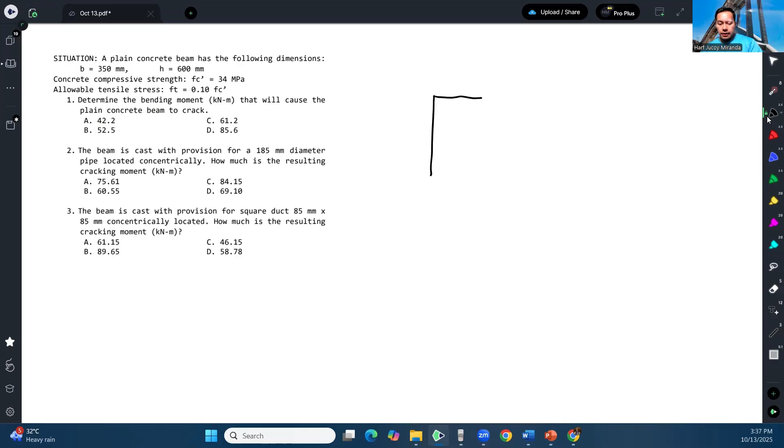So let's draw the beam. The cross-section is rectangular. This is 350 for the base, and this is 600 for the height. So that's our concrete beam.

Now, what's being asked in number 1 is: what is the bending moment that will cause the concrete beam to crack? We call that bending moment the cracking moment. The cracking moment is basically the minimum moment that you apply to your concrete beam so that it will start cracking. And where does it crack?

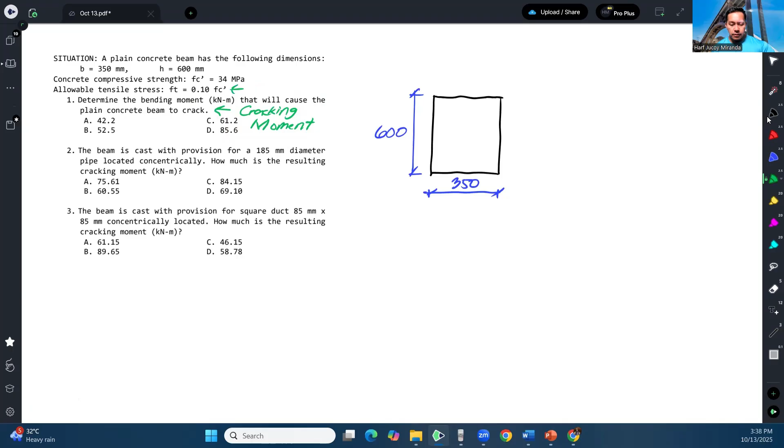So according to NSCP 2015, the modulus of rupture FR is given by 0.62 lambda square root of FC prime. So it's actually a function of the compressive strength of the concrete.

But for this particular problem, we're told to assume it's equal to 0.10 of FC prime. So we just follow what's given. But if nothing is stated, this is what we follow because it's what's in NSCP 2015. So that's the tensile stress or tensile strength of the concrete.

So in short, once the concrete reaches that stress value, whatever it may be, that means it will start to develop a tensile crack. And basically, we just need to find the moment that will cause that.

So to solve that, we will make use of our bending stress formula. If you recall, the bending stress formula is MC over I.

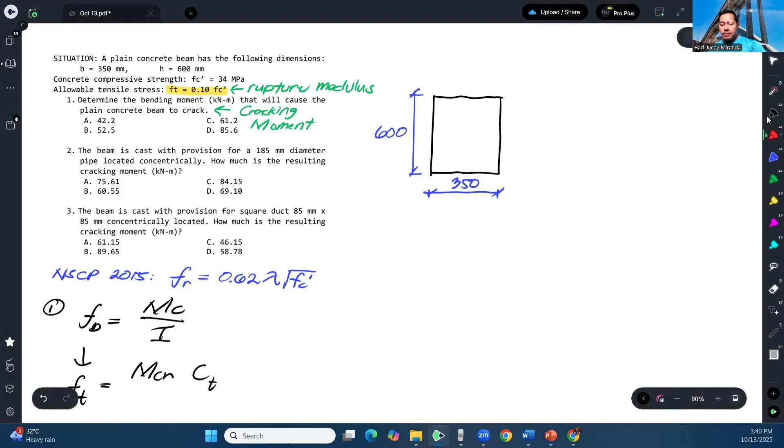So that means, if this is our neutral axis, the part at the bottom is the tension side. We call this the extreme concrete tension fiber.

Then the top part will be under compression. So this fiber is the extreme concrete compression fiber.

So for this particular case, our basis for determining the cracking moment is this extreme concrete tension fiber. That's why the C we're referring to is measured from the neutral axis up to that fiber — the C on the tension side.

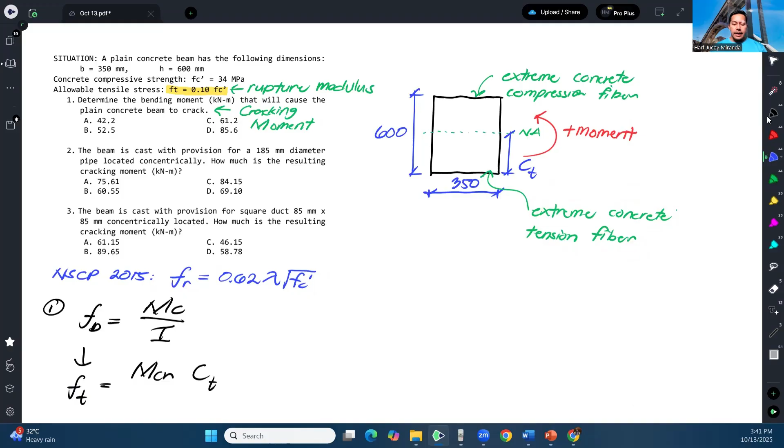And then over I, where I is the moment of inertia, or the gross moment of inertia. So from here, we can say that the cracking moment can be calculated as the tensile stress multiplied by the gross moment of inertia, over C of the tension side.

So that's the setup. Now, since this is just a rectangular section, we can easily solve for the moment of inertia and also easily define what CT is. In this case, our CT will just be 300, half of 600. So let's compute the gross moment of inertia first, which is just BH cubed over 12.

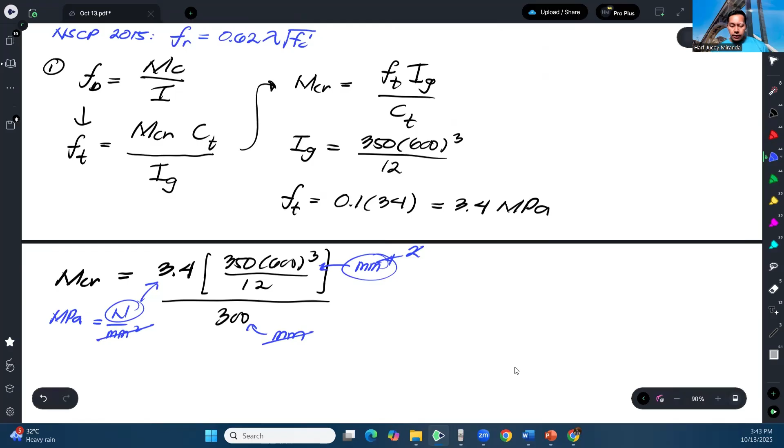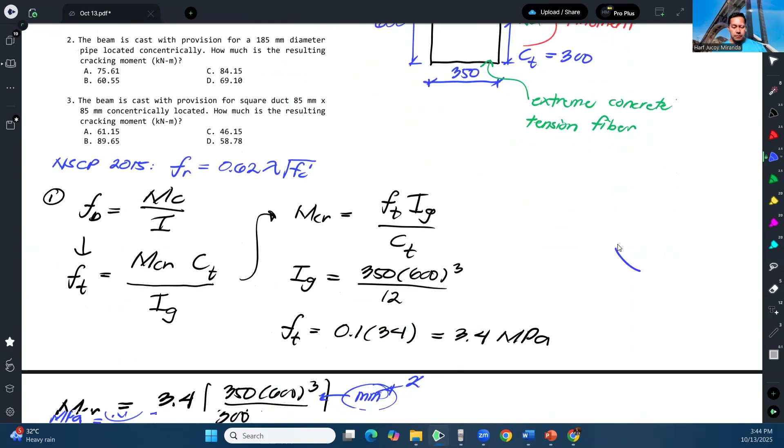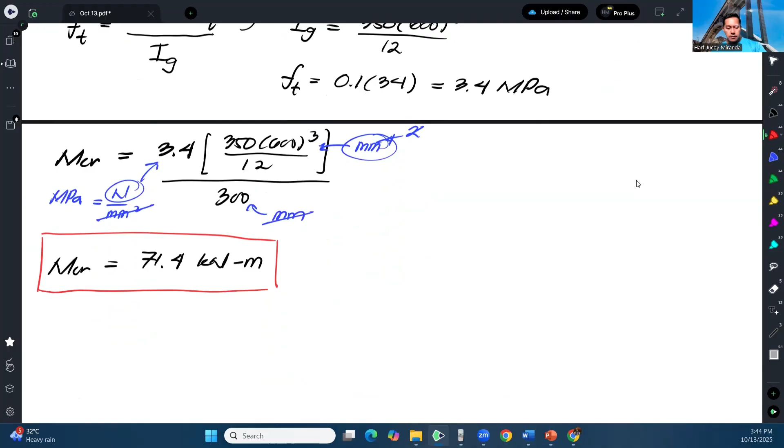We compute: 3.4 times 350 times 600 cubed over 12, over 300. This is in Newton millimeter. So that gives us 71.4, or in kilonewton meter, that is 71.4 kilonewton meter. So that would be our answer.

So in this particular problem, the answer should be 71.4 kilonewton meter. Next, the beam is cast with provision for a 185 millimeter diameter pipe located concentrically. How much is the resulting cracking moment? This time, a hole was placed for the pipe.

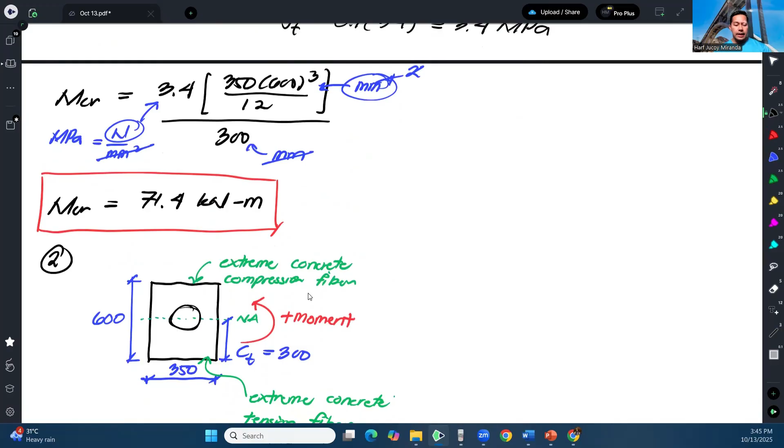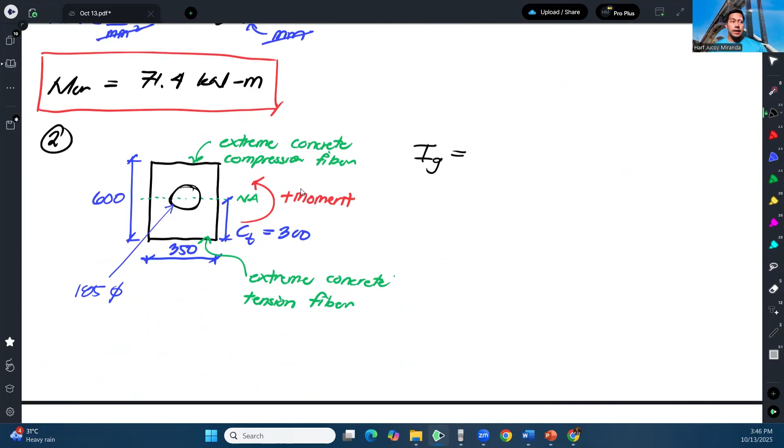This time, we need to recalculate the cracking moment. What will change here is the gross moment of inertia, which is now the rectangle minus the moment of inertia of the hollow circle. We don't need to relocate the neutral axis because the hole placed is concentric to the centroid of the rectangle, so the centroid of this section remains the same.

So it's just the moment of inertia of the rectangle minus the moment of inertia of the circle. The moment of inertia of a circle is pi over 64 times diameter to the fourth. So we write: 350 by 600 cubed over 12, minus pi over 64 times 185 to the fourth. That will be our gross moment of inertia.

For the computation of cracking moment, it will be the same formula, only this term changes: minus pi over 64 times diameter, 185 to the fourth.

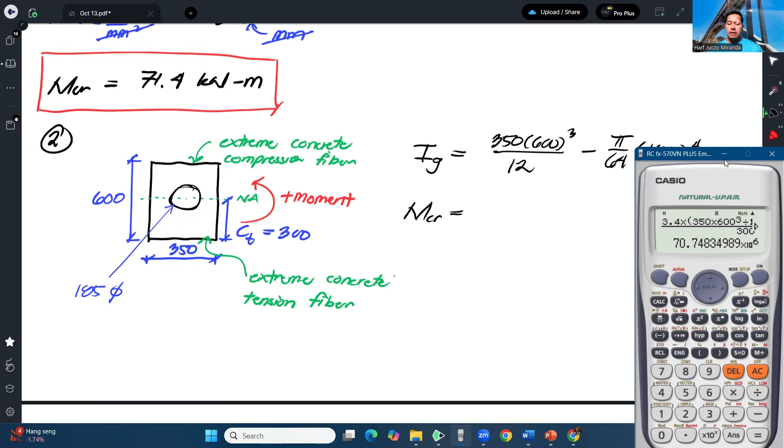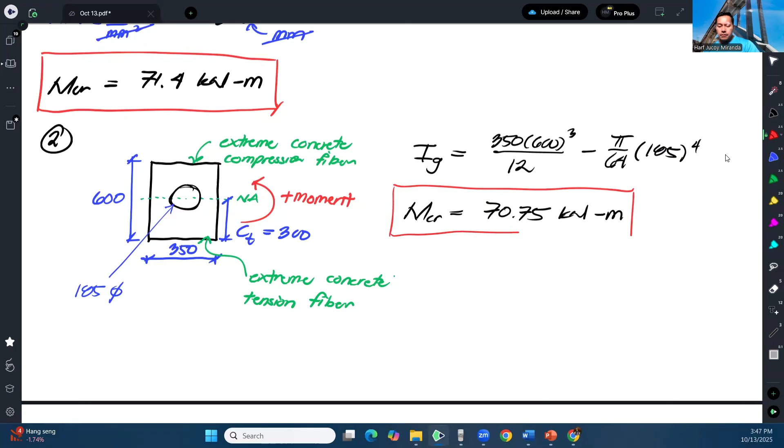That would give us 70.75 kilonewton meter, when divided by 1 million. That would be our answer. So here, the answer should be 70.75.

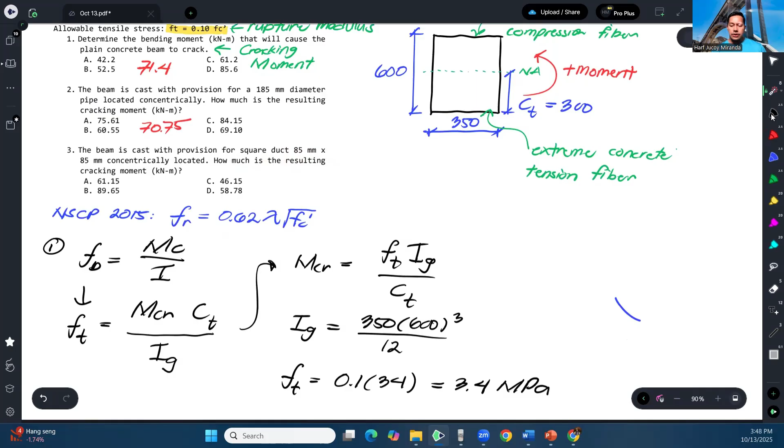And then lastly, the beam is cast with provision for a square duct, 85 mm by 85 mm, concentrically located. How much is the resulting cracking moment? So instead of a circle for the hole, a square was placed with this dimension. Let me redraw for number 3.

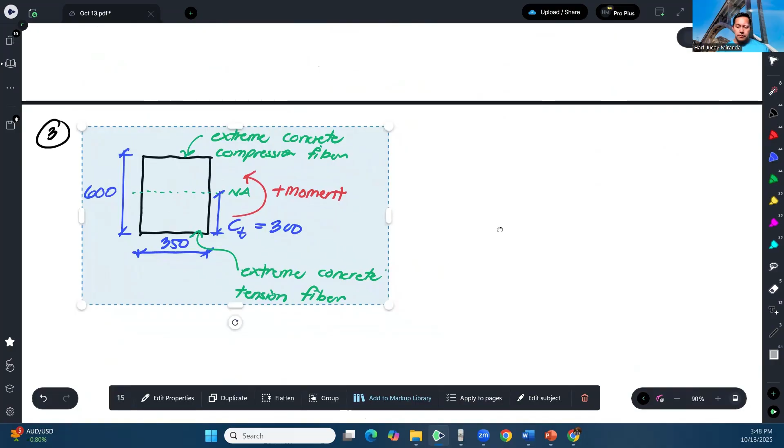So for number 3, a square was placed here, 85 by 85.

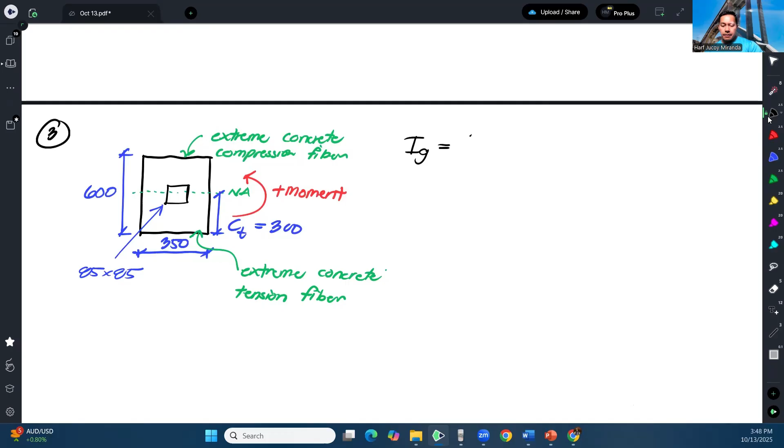So what changes here is just the gross moment of inertia. That is, once again, B H cubed over 12, minus the moment of inertia of the square, which is also B H cubed over 12. So 85 times 85 cubed over 12.

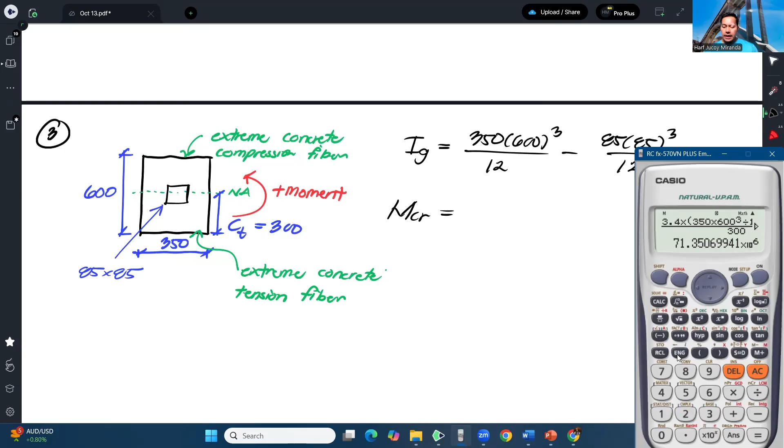So our cracking moment will become, using 85 to the fourth over 12, that gives us 71.35 kilonewton meter.

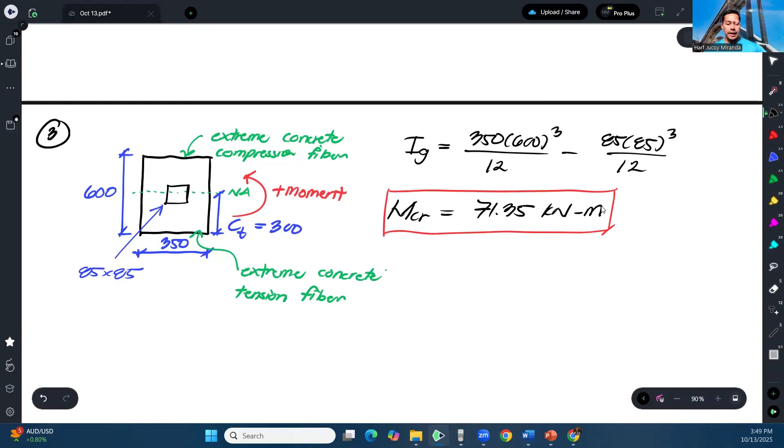So our answer here should be 71.35. And that's how we solve this problem.